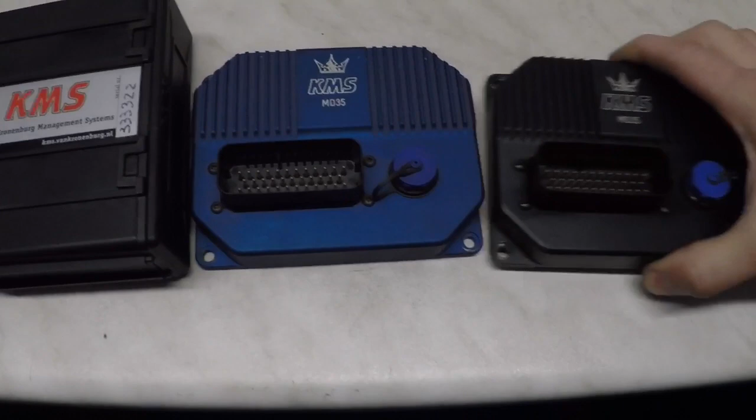Right, so this is the ECU we're going to be using, a KMS MP25. Most of my customers call it the black box one, because this is like the entry level one they do, although it's quite capable for an entry level ECU. You've got the MD35, which is how they come as standard, and they also do the Dakar edition, which is black with a carbon fibre backplate. But for now I'm literally just going to be using this one, so I'll talk you through it as we go.

So this is what you get when you buy a KMS MP25. You get the ECU itself in a black plastic case. You can also get them in a metal anodised case if you need something a little more rugged, but I've never found a problem at all with the black plastic cases. You get the main harness connector, the pins, all the little boots and rubber seals, and the software on a DVD, so everything you really need.

All you will also need is an RS232 converter, because it's got an RS232 connection, and not a lot of laptops have that nowadays, so that's the easiest way to go about it.

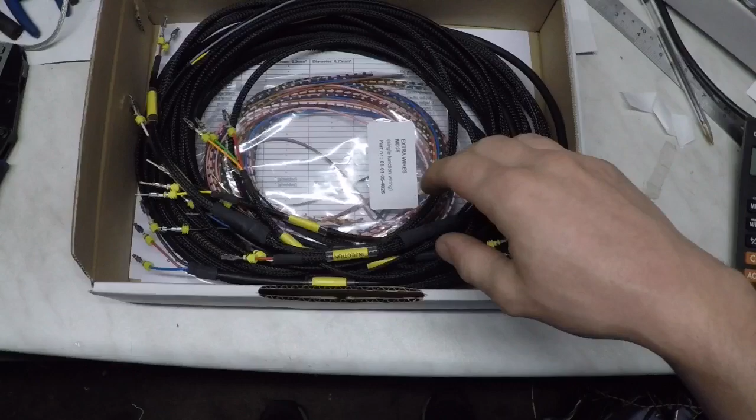So this is the wiring loom, the KMS wiring loom that you can buy as well. It's quite a nice loom, fully braided and heat shrinked at the ends, and it comes with all the pins already crimped onto the end. So all you have to do is put the connectors on, run it to length, cut it down, put the pins on the other end, and push them into the ECU plug. It's really simple to do. Don't be put off by it, I'm going to show you how.

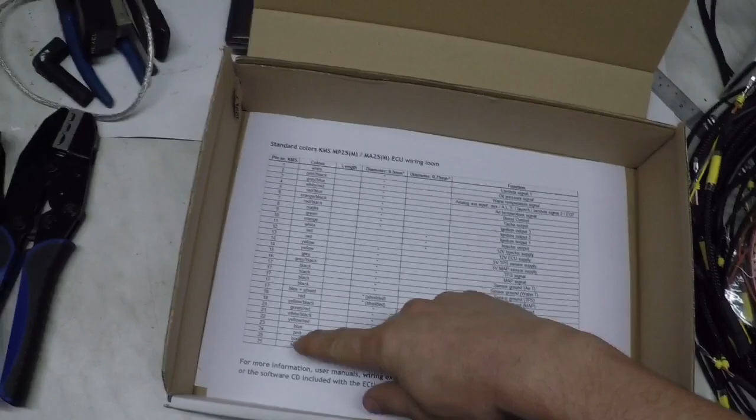So you get a nice braided loom with everything you need. This is the KMS MP25 basic loom for a 4-cylinder engine. You get every cable you could need to get an engine up and running, plus some extra wiring, which is quite nice, and a pin out of the plug. It's really simple, it's all numbered. I'll show you how to do it now.

So I thought I'd try and show you up close the ends of the loom. This is the basic MP25 wiring loom for a 4-cylinder, and it's got everything you need to get a Zetec engine or whatever you want to run up and running. You've got the crankshaft crank sensor wire in there, which is all shielded as well, just as it should be. You've got the MAP sensor, throttle position sensor, and the coil.

The pins on the end will go straight into any Ford connector. So if you've got an old Ford wiring loom, what I normally do is just nick the plugs off of it, and you can literally push these pins in, they'll clip in, and away you go. The KMS MP25, or all the KMS ECUs to be honest, won't actually drive a Ford coil pack direct. It needs a more modern coil pack like a Volkswagen one, which has built-in igniters, so that's what I'm going to convert over today, and I'll show you how to do that. If you want to keep the OEM look and use Ford Zetec coil packs or something like that, you can do that, but you need to buy an ignition driver, which you have to wire in line, which I'll cover another day.

So yeah, that's that. You've got the injection harness all done, all connected up, all nice again with pins on the end. The standard Ford injector plugs will clip straight into these. You've also got Lambda sensor wiring, inlet air temperature sensor, and engine coolant temperature sensor - every basic sensor you'll need to get it up and running. There's plenty of cable as well, so you can mount the ECU wherever you want, just cut them down and crimp the pins on the end.

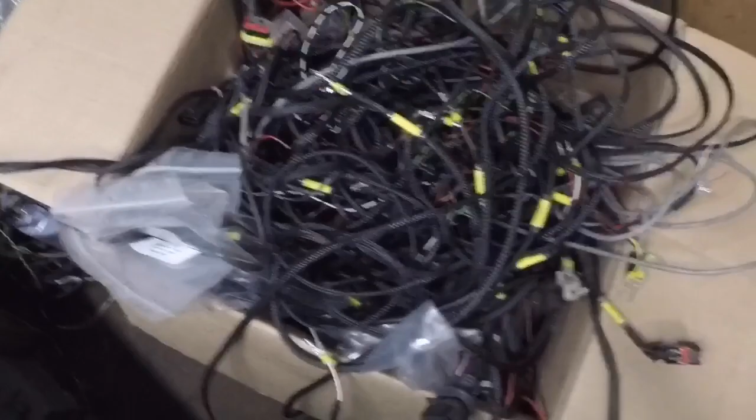I thought I'd pre-warn you now, just before someone picks up on it. The loom I literally just showed you is a brand new loom in a box, but because I'm wiring this up on my van, I've got a massive box of KMS wiring that every garage has, full of connectors and bits and bobs. So rather than use a brand new loom, I'm going to be using KMS loom again, but pulling it out of all these odd wires that I've got. It seems a shame to just sit it all there.

These are the coil pack drivers that I said about earlier. If you want to run a Ford Zetec coil pack direct, you will need one of these. They are really easy to wire up, to be fair, but I like to just switch over to this type of coil pack. This is just a Volkswagen coil pack. You can get them off the internet for like 30-40 quid, and I just use Volkswagen Polo leads, because they're quite good leads, and the coil packs seem to perform a lot better than what the Zetec ones do, especially when it comes to reliability. The Zetec ones tend to fail every now and then, I've noticed.

So basically, if you notice that the wiring loom I'm using is not as clean and pristine as the one I just showed you, that's why - because I'm going to be pulling it out of this box of spares I've got.

Okay, so we've got the KMS Injection Harness, which is the wiring loom that goes to all 4 injectors. I'm going to try and show you how to connect these pins to a standard Ford loom.

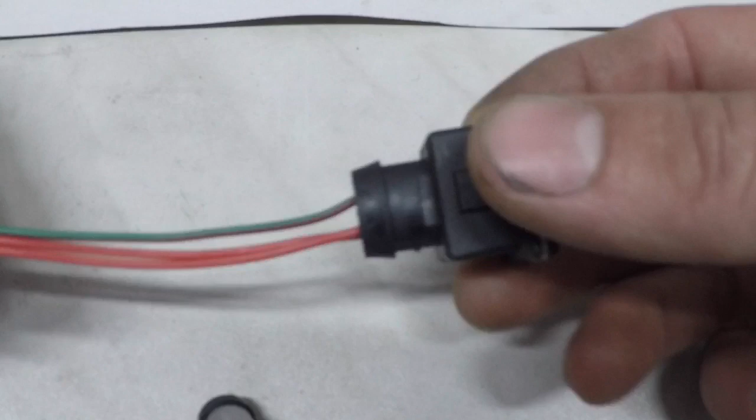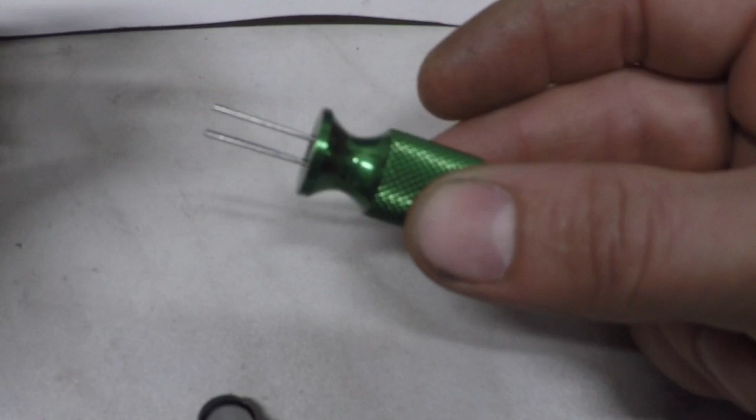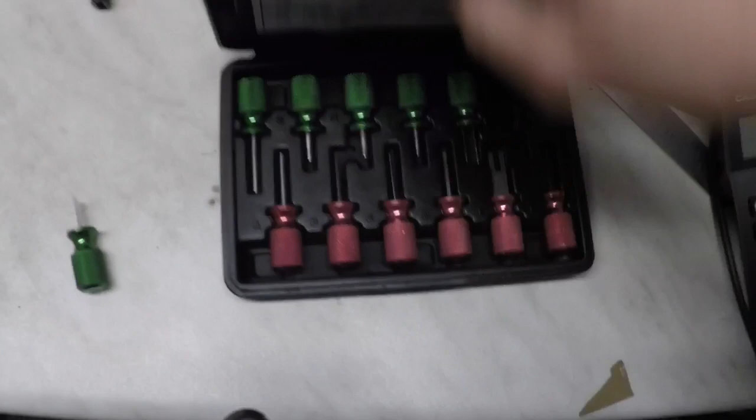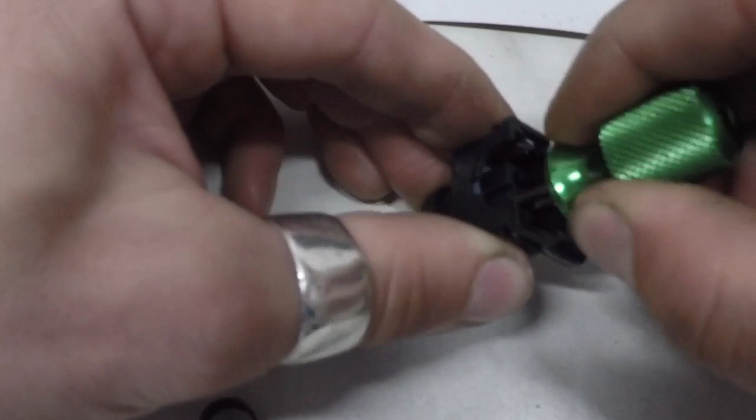So I've just cut this plug off of an old loom. This is the same type of plug that the fuel injectors on the van use. I'm going to show you the easiest way to get the pins out. You need a pin tool like this - I got this one out of a Blue Point toolkit, part number TT12KT. If you've got a Snap-on account, you can order these and get loads of different types. But I'm using the K tool - you get the plug like this, then slide the pin tool either side of the pin, push it down until it clicks, then give the wires a tug on the back of the plug and they come out like that. Do that with the other one too, just till it clicks, and out it comes.

Now you can use this plug on the KMS harness. So basically you've got the harness, and all you do is slide the pins in - let me show you as best as I can - and they just clip straight into the standard Ford plugs. There you go, just push the little yellow bits down and that's it. That's how you put the plugs on the end of the KMS loom.

So the next one I'm going to wire up is the water temperature sensor. If you watched my old videos, you'll remember that on the back of the thermostat housing I actually drilled, tapped and fitted a water temp sensor. So I'm just going to use that, which makes life nice and easy. Just clip that on, there you go, away you go. Now I can poke this whole length of loom through into the back of the dash, and wire it all up in a minute.

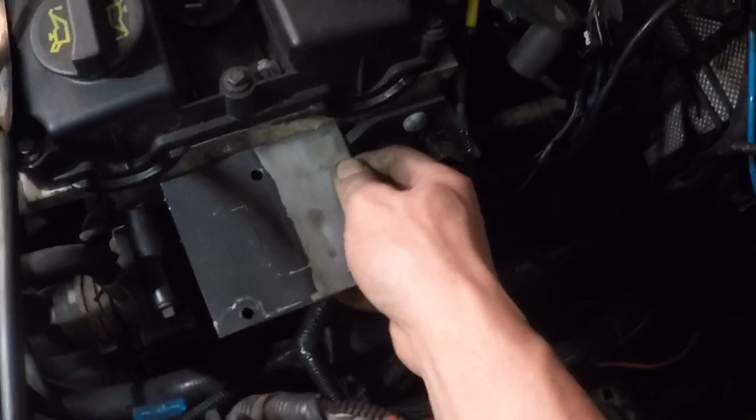So I stripped off the standard Ford coil pack, and got rid of the bracket it bolted to as well. I've bolted a flat piece of bar to one of the original holes - I might make one off that hole too at some point. Then I've got a metal plate that bolts to the bottom of the Polo coil pack. I'm just going to weld that to there, and then I can mount the Volkswagen coil pack just there. The Zetec blacktop leads will plug straight onto a Volkswagen coil, which makes it nice and simple.

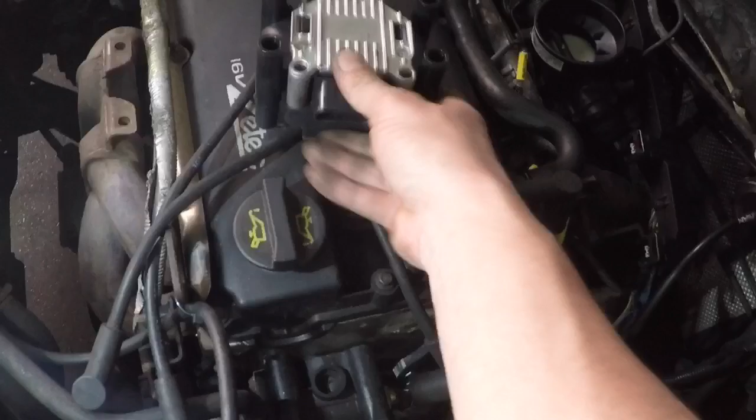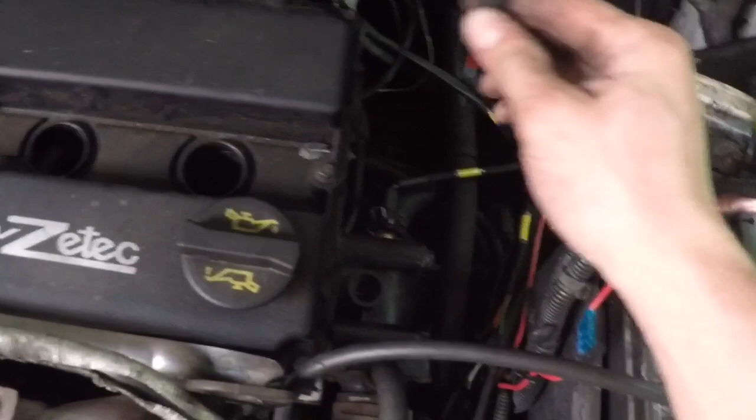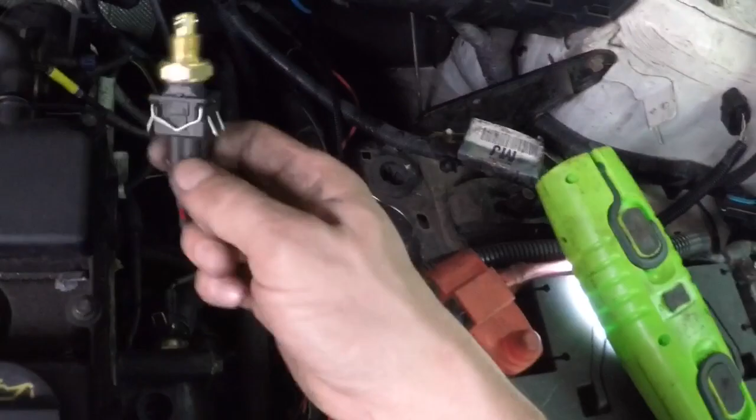Okay, so I've run the wiring through for the coil pack and put that inside the cab. The inlet air temp sensor, I've put a connector on that. If you watched one of the last videos, you know I had an inlet air temp sensor screwed into the side of the airbox, so I'm just going to reuse that, but I've not got the airbox on the van at the minute, so I've just plugged that in for a reference.

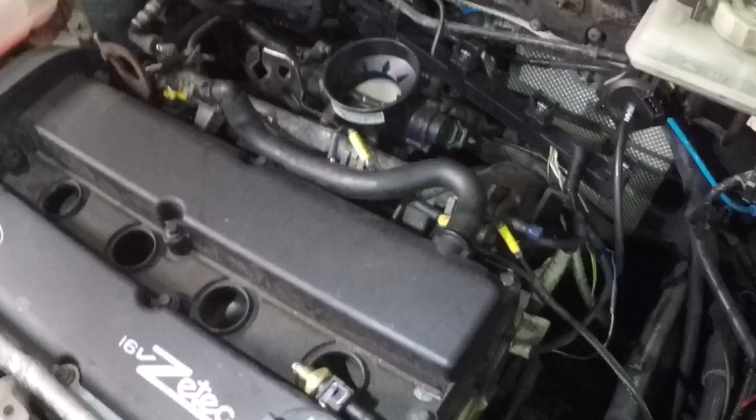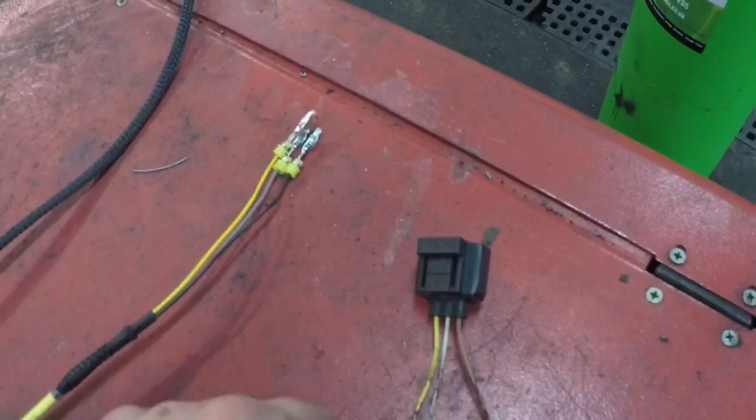On the throttle position sensor, you can't really see it down here. It's on this standard blacktop Zetec with the black plastic inlet manifold. The TPS is a bit of a weird plug, so I've chopped this one off a loom, and I've got the TPS wiring from the KMS loom. Looking at it from the back of the plug, you've got the brown which is the earth, the yellow on the left which is the 5-volt feed from the ECU to the TPS, and the white which is the return to the ECU.

It's pretty similar on the KMS wiring - black is your ground, yellow is your 5-volt feed, and grey is your signal return. It literally just needs to be connected to the plug like that. So black for earth, grey for signal return, and yellow for the 5-volt feed. I'm just going to cut the pins off this wiring, cut it off the plug, then solder it and heat shrink it to make it look nice. That's what I'm going to do now.

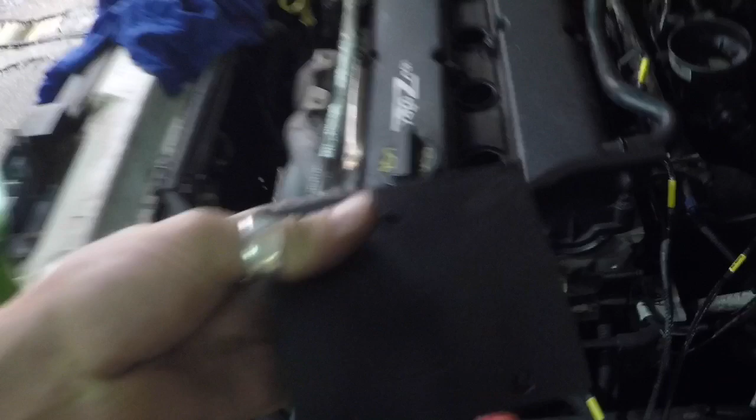So I've got that little piece of metal I was talking about, just put a few blobs of weld on the side of it, and that's going to bolt just there to one of the old coil pack bracket bolt holes. I might at some point put another bracket on, but I'll probably just leave it as is - I'm sure it'll be fine. So yeah, going to bolt that on now.

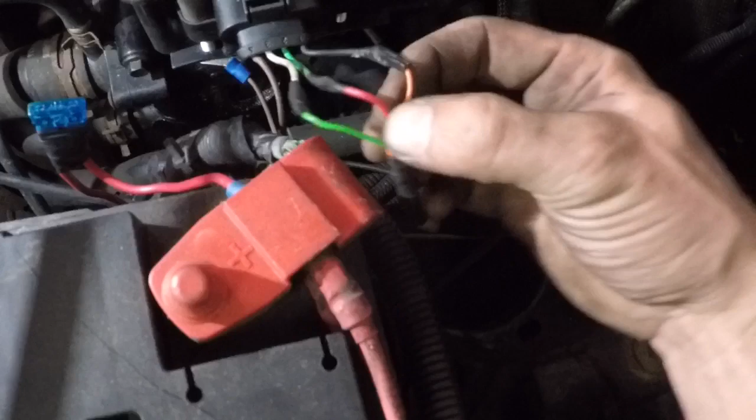Should mention, obviously I'm using the Volkswagen coil pack. I thought you might like to see how the colours wire up in reference to the plug. I got this plug off the internet - it's not the same colours as Volkswagen, but in the KMS wiring, looking at the back of the plug, orange goes to pin 1, the red 12-volt feed goes to pin 2, the green wire on the KMS loom goes to pin 3, and pin 4 is just a ground, so I've put a crimp on the end of that and bolted it down to the bottom of the coil pack.

Fitted the TPS wiring, run it all through into the car, so getting there slowly.

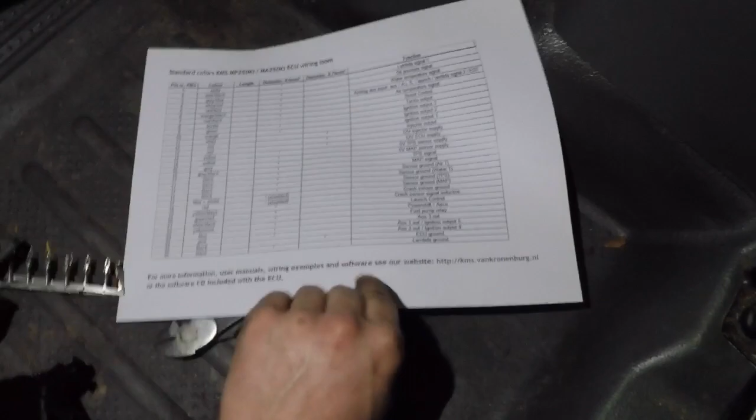Okay, so I've got the pin out that comes with the wiring loom, and it tells you what number and what colour does what on the ECU, so it's nice and simple. On the back of the plug, you probably can't see it very well because it's very small, but the pins are all numbered - just along the bottom there. You've got 1 to 13 across the bottom, and then 14 to 25 across the top, looking at it from the back of the connector, just to save confusion.

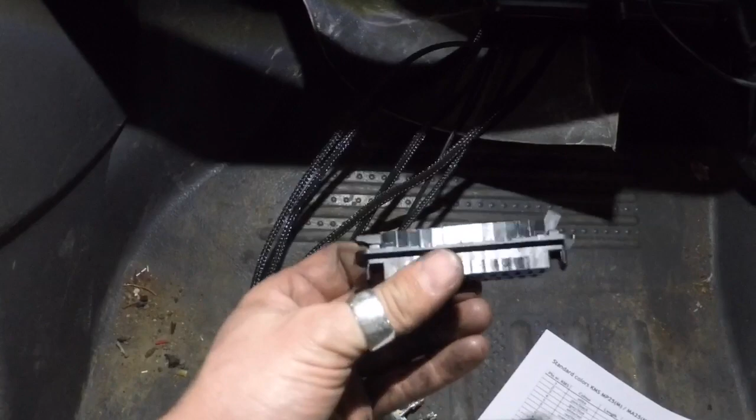One thing I'll say is, obviously this is the ECU plug that clips on the top of the ECU, and that's the connector that goes inside that. I always forget to put this on first before I start connecting all the pins, so I'm going to do that straight away right now, because if you forget, you have to unpin the whole plug and start again basically.

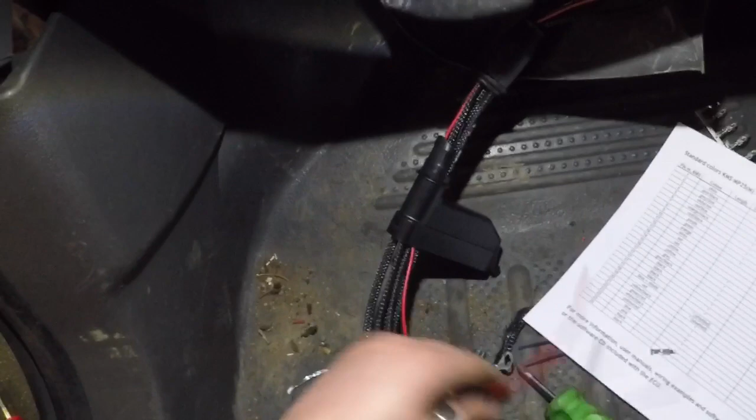So I've cut all the loom to length and fitted the little rubber grommet on the back of the ECU plug, like I said I always forget. I've also connected up - because from the previous ECU it was already there, so I just changed it around a bit - the switched ignition 12 volts to power the ECU up, and I've also wired in a ground so the ECU's got an earth. A lot of the sensors obviously all have to go to ground as well.

It's not advised to put them all in the back of the same pin because it doesn't really fit. It says to ground them as close to the ECU as possible, so they all go to the same earth to avoid interference, but there's not a lot of room in the plug, so connecting them all up in there makes it hard work.

So all I do is on the earth wire that actually goes into the ECU, I connect all the returns, all the sensor earths to that same wire, but just outside the plug, just to make it a little bit neater inside the plug. I've also cut back some of the braid and just left a couple of inches so it doesn't get in the way.

So yeah, that's what's next. I've just got to put the pins on the end.

Okay, this is going to be quite awkward to show you, but I'm going to try my best. The first pin I'm going to put on is the 12 volt ignition feed to the ECU.

This is what the pins look like when you just break them off the little strip of pins you get. You need to strip a few mil of the cover off the actual wire, and then tuck it into the back of the pin so it sits like that. I don't know how well you can see that, but meh.

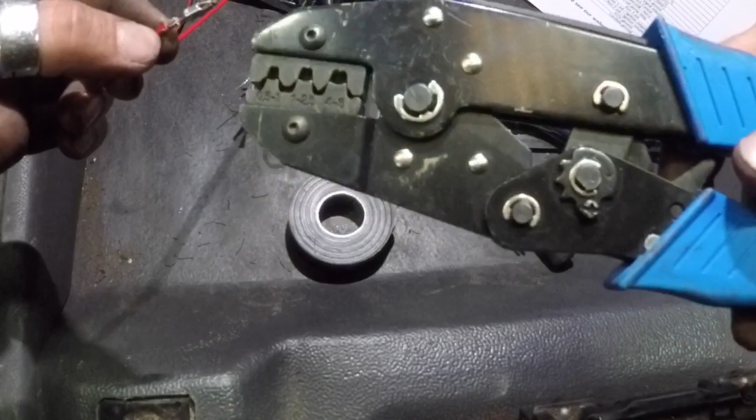These are the crimps that KMS advise you use, and they do sell them on their site, but you can get very similar things from Snap-on and stuff like that. These work quite well, so this is what I use basically.

So basically, when you're putting the pins on the end of the wire, you need to strip a few mil of the bare cable back, and then it needs to sit in the pin like that. So that's what you're aiming for. I don't know how well you can see that, but it literally has to sit basically like that. It's got to sit like that.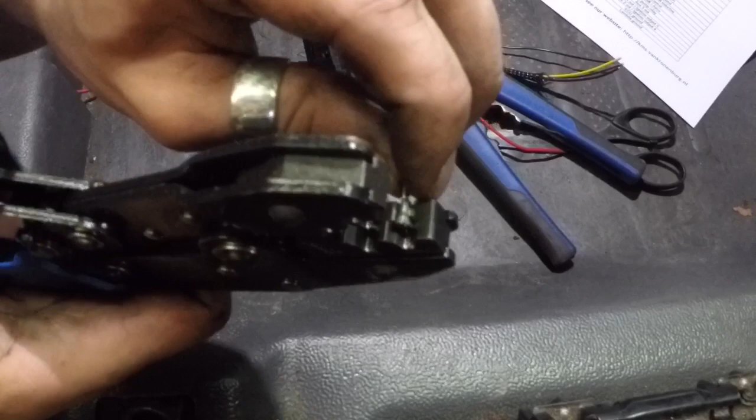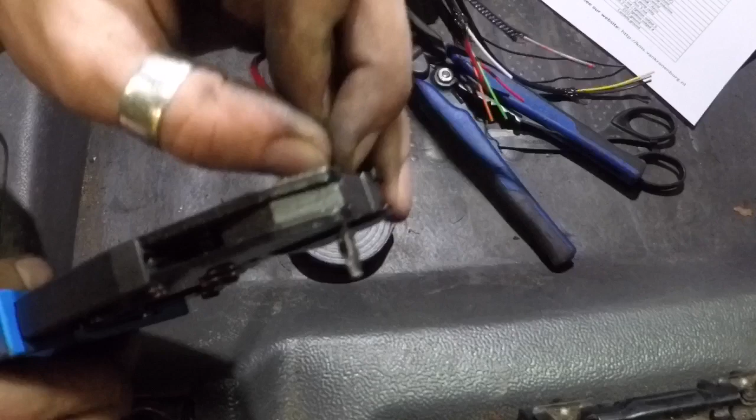There you go. So you want the pin to poke out the back, and then you thread the wire in there just till you see it sit nice and snugly, and then crimp it. And there you have it, that's what it should look like. It should just grab the outer sheath of the cable, and that stops the pin falling off, that anchors it, and then the inner bit just gets rolled nice and flat.

If you haven't got any of these crimpers, you can do it with just a pair of normal side cutters. I suppose I should show you that way as well. It's a little bit of a bodge, but sometimes I find it a bit easier to do, especially on some of the thinner wires. It can get quite tricky, so I'll show you that now.

Break your pin off of the little rack, stick your wire into it like that, and then you can just very gently roll the edge of the pins over.

It's not the best way of doing it, but I have done it like this in the past before I had the crimpers, and it works fine. By the time you've done one, it's quite easy. There you go, done, just like that. See, just with a pair of normal side cutters. Snap-on again, or Blue-Point, whatever you want to call it.

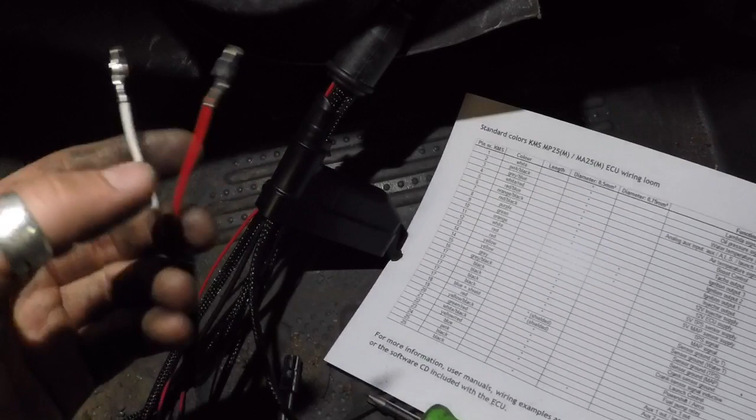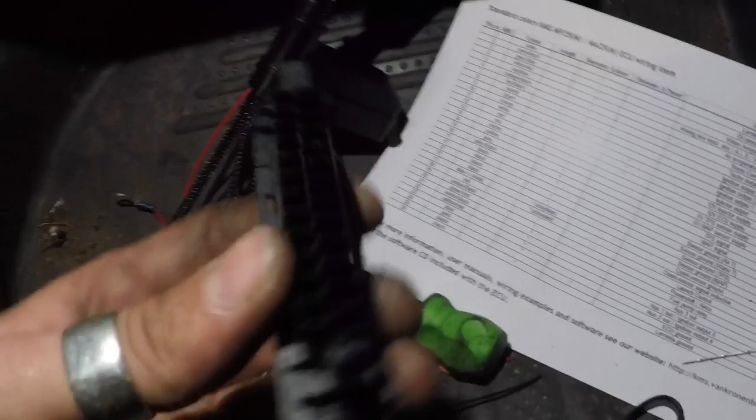Okay, so now I've put some of the pins on the ends of the wires. This is the red and white wire. White, I believe, is fuel injection, which is easy enough. Find the white wire there, which is pin 11, injector output. So all you do is find the plug, go to pin 11, which is there. This is going to be hard to do one-handed, but you literally just put the pin in like that, and that's it, it's fitted. That's all you have to do.

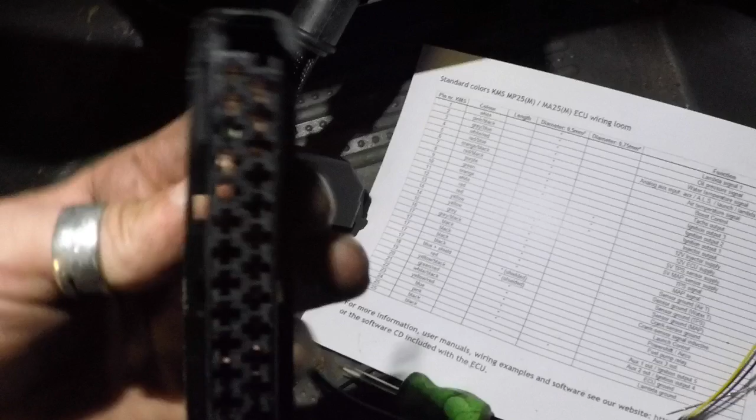And then somewhere near it will be a red pin, pin 12, injector 12 volt supply, so that's the one next to it. Again, just put that in the plug, one-handed and cack-handed, like that. Done, that's the injector supply done. See, it's easy as that.

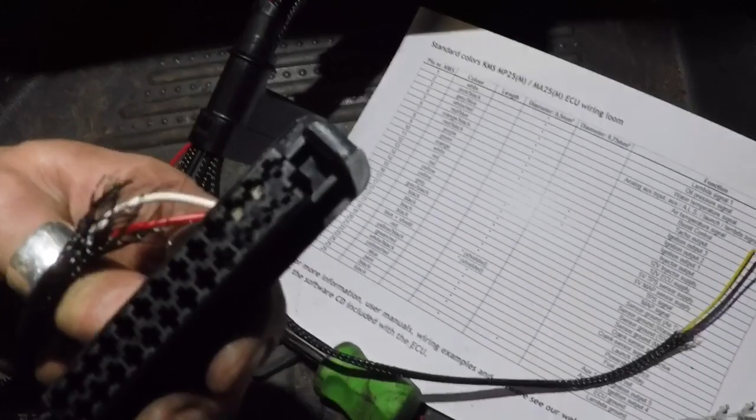Now all I've got to do is carry on doing this with the rest of the colours, and before I know it, all the wires are in the plug, and it should be time to start. See, not hard, is it?

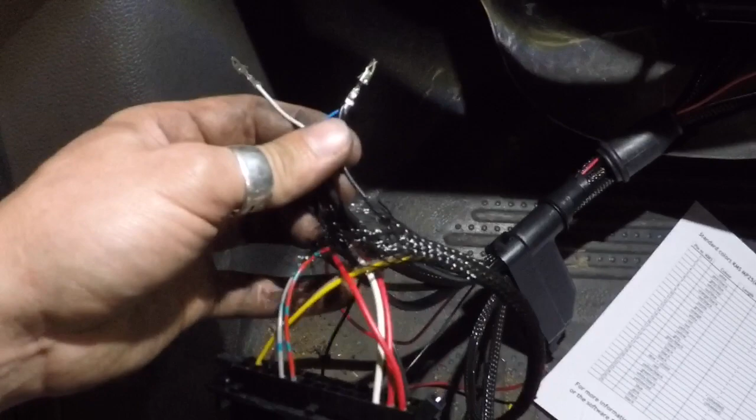So what I forgot to mention was that the ECU's got its own ground, which is pin 25, and that's also the Lambda ground as well.

If you're running a Lambda sensor, you should really ground it to that wire. Because I'm not running a map sensor at the moment, I realised I didn't have a map sensor ground as well. So what I did was twist all the wires together nice and tight, and managed to squish them all into one crimp. Not ideal, but all the sensors—air temperature, water temperature, throttle position, and crank sensor ground—all go to the same pin, pin 17, which grounds them through the ECU to stop interference. So it's quite a neat idea.

It does say in the manual to connect them all together as close to the ECU as you can, for that reason. But because I'm not running a map sensor, I managed to get all the wires into the same crimp. It doesn't look too great, but I'm sure it'll work fine. Just to be on the safe side, I'm going to put a little blob of solder on the edge as well, just to make sure they're all connected nicely.

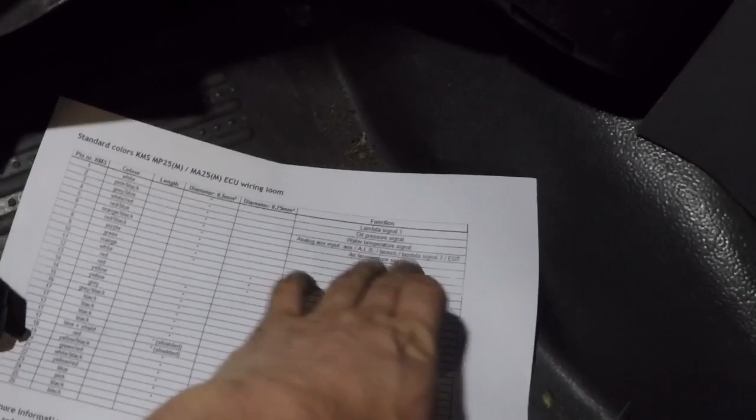So yeah, getting there slowly. I've put all the other wires in. It's really simple to do—they're all color coded, like grey and blue. A grey wire with a blue tracer—you just look it up, and grey and blue is pin 3, which is the water temperature signal. So really easy.

Red with a blue tracer—again, look here, pin 5, red and blue is the air temperature signal, and it tells you where it goes. All the plugs are numbered across there, so you literally crimp the wires on the end, plug them in, and it's as simple as that. There's really nothing to it—it's not that scary when you actually get down to it. This is going to be the coil pack wiring. I've still got to do that, but getting there slowly.

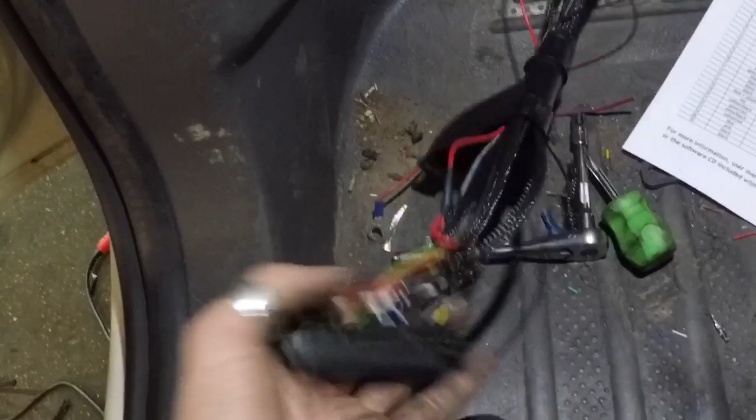Okay, so I've finished off all the wiring needed to make it run. This is the bare minimum to get this car up and running—no Lambda sensor or anything like that, or any launch control wired in. Not that you need launch control to make it run, of course.

All I've done is this one, which is the feed to the coil pack with the green and the orange, which has a red—that red is a 12 volt feed to the coil. So all I did is take the 12 volt feed going to the ECU, loop it around and connect it to that. I've just soldered it on and insulated it.

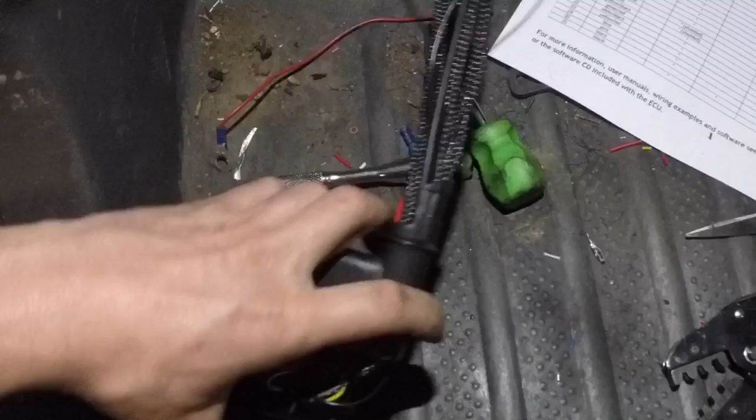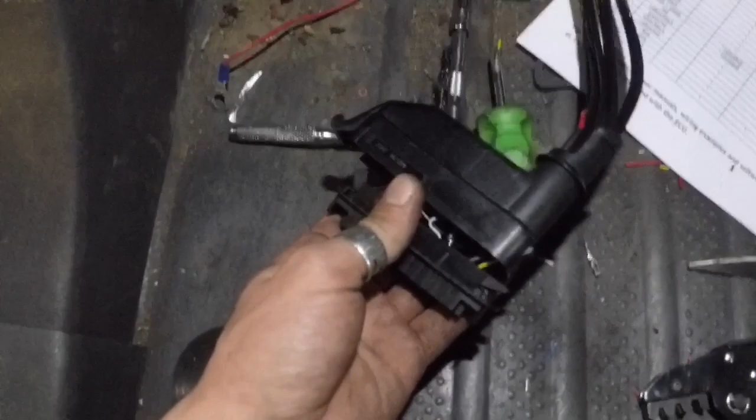It's quite hard to see, but now you sort of twist and manipulate the wires, moving them all over until you slide the plug down. Then the back half of that plug hooks in up there, and a little screw goes through and into there, holding it all in place nicely. So I'm going to do that now, and a few more bits and bobs, and see if I can make it run. Right, sorry about the mess.

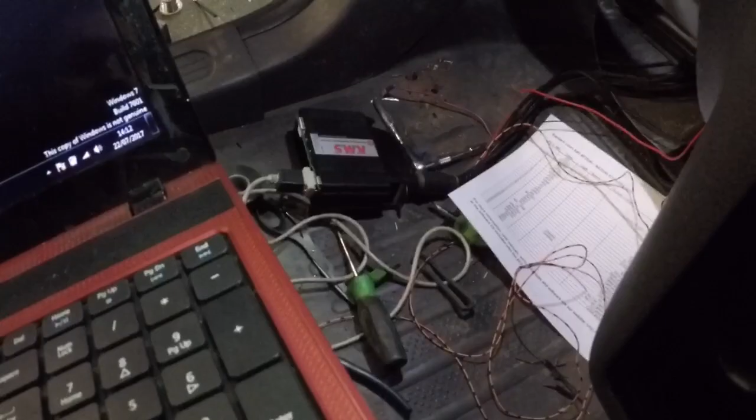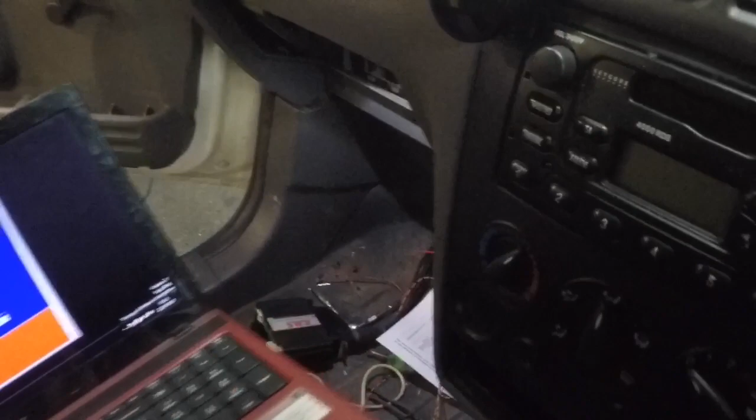So I've got the ECU plugged in now. Some things I forgot to mention: because I'm wiring the KMS ECU up in my van, the van's already fuel injected, and I've left the standard ECU in place under the dash to control the clocks and bits and bobs like that. So I haven't had to wire up things like the fuel pump feed or the cooling fans, because the standard ECU will take care of that. It's still in place and still doing the job it thinks it's doing, but it's not controlling the injectors or the coil pack—the KMS ECU is. So you'll have to take into consideration wiring up things like that as well.

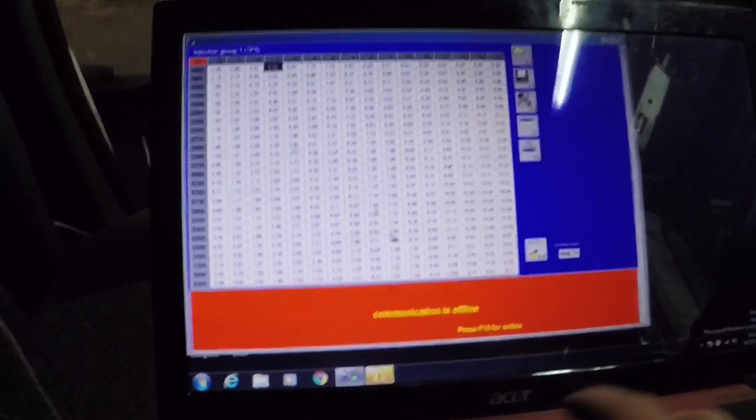So other than that, I've got the ECU in now. Turn the ignition on, which will power the ECU up. If we go to the software, F10 to connect, he says. There we go—always click system to PC.

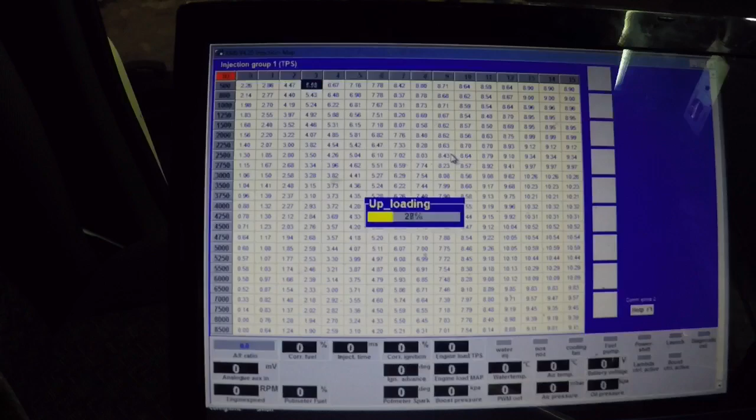And it uploads the data from the ECU. I've put a base map on here. Some things you want to check first off are down here, the water temp sensor and air temp sensor. This van hasn't run in the last 5-6 hours, so you'd expect the coolant temp and air temp to read about the same, and it's about 22 degrees, so that's fine. 22 degrees for water temp and 24 for air temp, so around the same.

Now this here is engine load and throttle position. As you can see it's sitting quite high in the map, which means this will need calibrating, which is pretty easy to do.

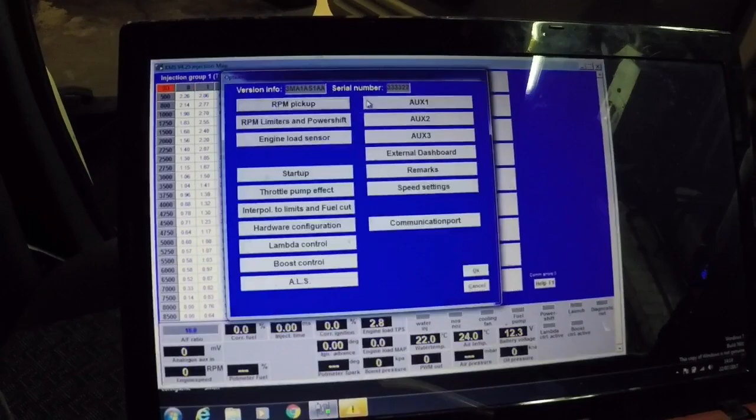You literally go F4, options, engine load sensors, and then you've got automatic calibration there. So you click on that, and it says set the engine load 1 sensor to minimum, so don't touch the throttle. Okay, now set it to maximum, so hold the throttle flat out, and then press OK. And that's done.

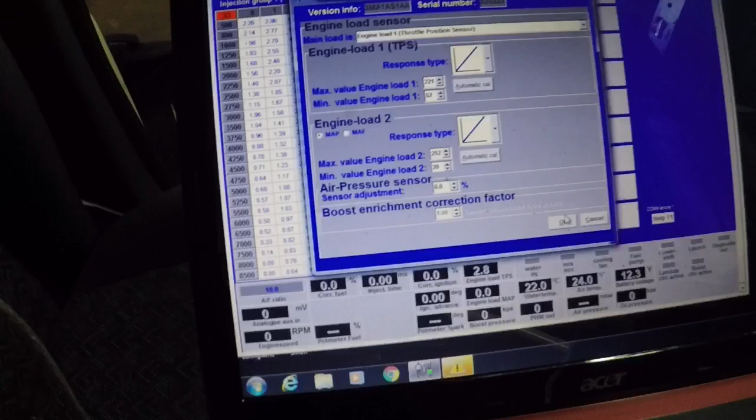Now if you go back to the main screen, it will download the data again. Then all you have to do to save it with KMS is press Alt and then L, and that's it, the data is now saved to the ECU.

Now I'm going to try and start it. It's probably not going to start because the first thing you want to check for when cranking is to make sure you've got an RPM signal down in the corner. So I'm going to do that. This one's... you know, I could probably make that bigger actually. Nope, it just disconnects the ECU. Live and learn, every day's a school day.

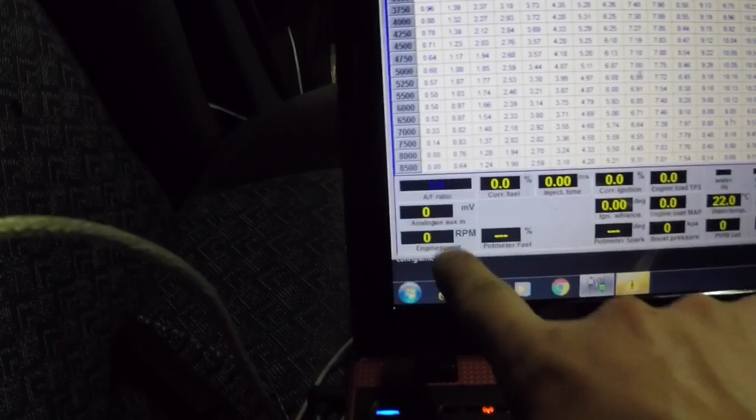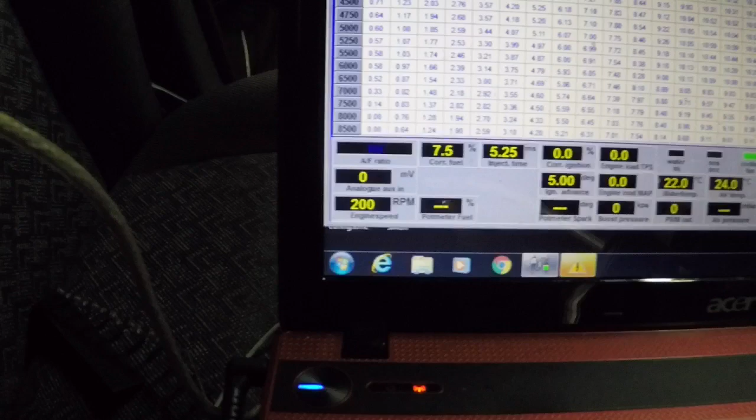Okay, so down in the corner you've got engine speed and RPM. I'm going to crank it now and make sure we should see a couple hundred RPM. That's fine, 200 RPM, but obviously it doesn't start. So I'm going to hazard a guess that I've got the HT leads on the wrong way around. I'm going to go play around with them and see if I can get it to fire.

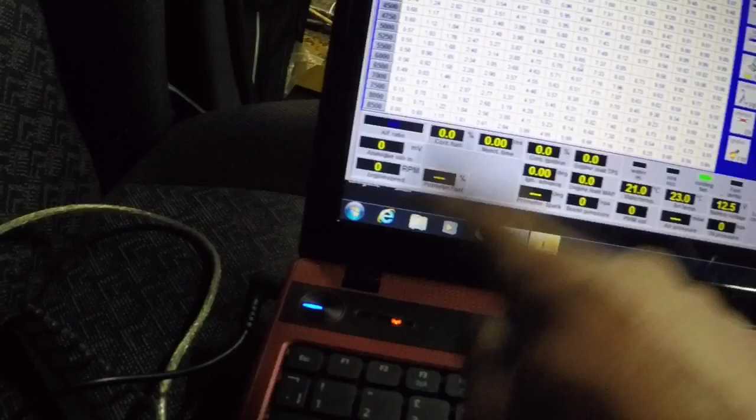Okay, so after a few failed attempts trying to start it, I realised that while I was cranking, when it was coughing, I was actually losing RPM signal. I could see down in the bottom here, while cranking it was about 200 RPM, and then it was dropping off to 0 every time the engine coughed. So it raised my suspicion slightly, so I swapped the wires around on the crank sensor.

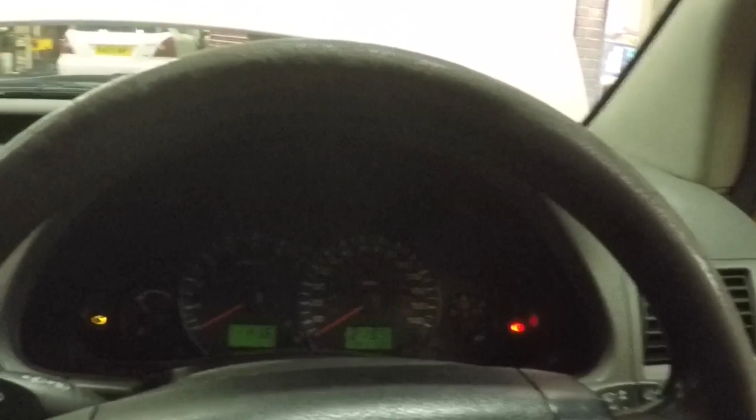And now, a bit rough, but it does run. Runs right, needs a bit of mapping, but yeah, so it's a good start, a very good start. So now I can work from there.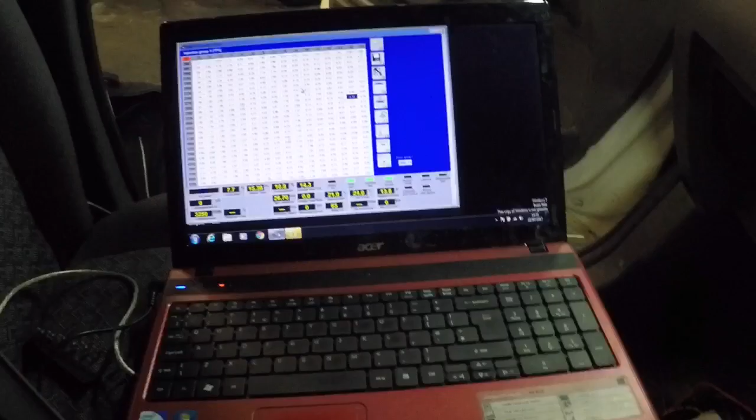I've just got to put all the glove box back together, mount the ECU. Does sound good. Obviously the engine light's on because the standard ECU is having a bit of a freak out.

So yeah, mapping time. The van is all back together, glove box is back in, ECU's all up and running, roped a mate into driving for me, and he's falling asleep while we cruise down the motorway in the rain. Getting there, slowly tuning the light throttle loads, gonna give it a bit more soon, do some flat out mapping. What's it drive like? Drives alright, yeah good, 60 mile an hour, just cruising along, you know?

Yeah, so there we have it. We went out and about, we put a little bit of a base map on the KMS ECU. Van drives really nice again, which is great.